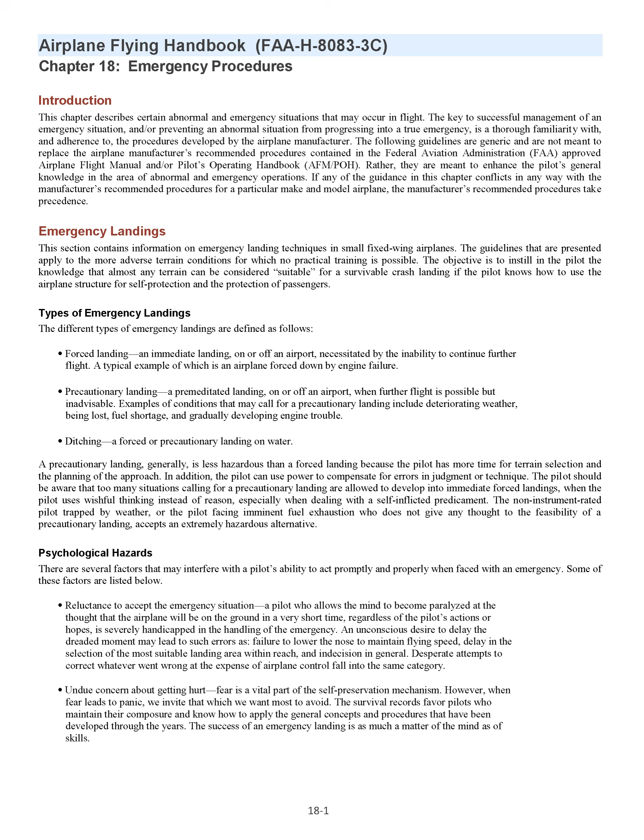Desire to save the airplane. The pilot who has been conditioned during training to expect to find a relatively safe landing area, whenever the flight instructor closed the throttle for a simulated forced landing, may ignore all basic rules of airmanship to avoid a touchdown in terrain where airplane damage is unavoidable. Typical consequences are: making a 180 degree turn back to the runway when available altitude is insufficient, stretching the glide without regard for minimum control speed in order to reach a more appealing field, and accepting an approach and touchdown situation that leaves no margin for error.

The desire to save the airplane, regardless of the risks involved, may be influenced by two other factors: the pilot's financial stake in the airplane and the certainty that an undamaged airplane implies no bodily harm. There are times, however, when a pilot should be more interested in sacrificing the airplane so that the occupants can safely walk away from it. Basic safety concepts.

A pilot who is faced with an emergency landing in terrain that makes extensive airplane damage inevitable should keep in mind that the avoidance of crash injuries is largely a matter of: 1. Keeping the vital structure, cabin area, relatively intact by using dispensable structure, i.e., wings, landing gear, fuselage bottom, to absorb the violence of the stopping process before it affects the occupants, and 2. Avoiding forceful bodily contact with interior structure.

Avoiding forcible contact with interior structure is a matter of seat and body security. Unless the occupant decelerates at the same rate as the surrounding structure, no benefit is realized from its relative intactness. The occupant is brought to a stop violently in the form of a secondary collision.

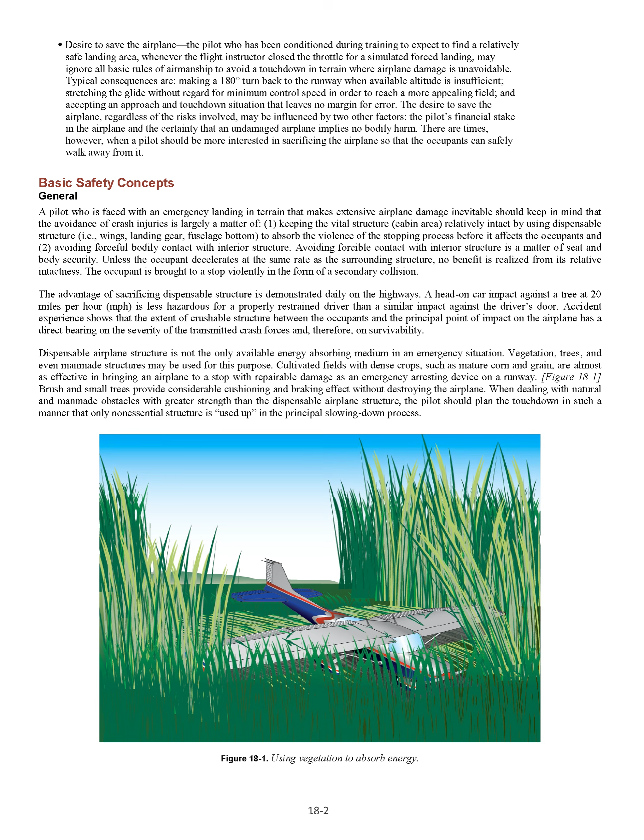Dispensable airplane structure is not the only available energy-absorbing medium in an emergency situation. Vegetation, trees, and even man-made structures may be used for this purpose. Cultivated fields with dense crops, such as mature corn and grain, are almost as effective in bringing an airplane to a stop with repairable damage as an emergency arresting device on a runway. Brush and small trees provide considerable cushioning and braking effect without destroying the airplane. When dealing with natural and man-made obstacles with greater strength than the dispensable airplane structure, the pilot should plan the touchdown in such a manner that only non-essential structure is used up in the principal slowing down process.

The overall severity of a deceleration process is governed by speed, ground speed, and stopping distance. The most critical of these is speed. Doubling the ground speed means quadrupling the total destructive energy and vice versa. Even a small change in ground speed at touchdown, be it as a result of wind or pilot technique, affects the outcome of a controlled crash. It is important that the actual touchdown during an emergency landing be made at the lowest possible controllable airspeed, using all available aerodynamic devices.

Most pilots instinctively, and correctly, look for the largest available flat and open field for an emergency landing. Actually, very little stopping distance is required if the speed can be dissipated uniformly, that is, if the deceleration forces can be spread evenly over the available distance. This concept is designed into the arresting gear of aircraft carriers that provides a nearly constant stopping force from the moment of hookup.

The typical light airplane is designed to provide protection in crash landings that expose the occupants to 9 times the acceleration of gravity, 9g, in a forward direction. Assuming a uniform 9g deceleration, at 50 miles per hour the required stopping distance is about 9.4 feet, while at 100 miles per hour, the stopping distance is about 37.6 feet, about 4 times as great. Although these figures are based on an ideal deceleration process, it is interesting to note what can be accomplished in an effectively used short stopping distance.

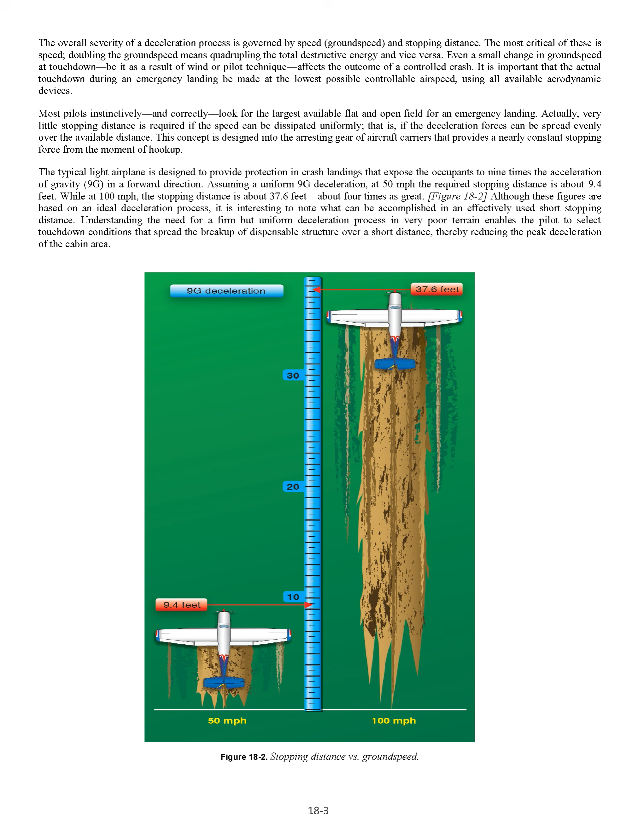Understanding the need for a firm but uniform deceleration process in very poor terrain enables the pilot to select touchdown conditions that spread the breakup of dispensable structure over a short distance, thereby reducing the peak deceleration of the cabin area. Attitude and sink rate control.

The most critical and often the most inexcusable error that can be made in the planning and execution of an emergency landing, even in ideal terrain, is the loss of initiative over the airplane's attitude and sink rate at touchdown. When the touchdown is made on flat, open terrain, an excessive nose-low pitch attitude brings the risk of sticking the nose in the ground. Steep bank angles just before touchdown should also be avoided, as they increase the stalling speed and the likelihood of a wingtip strike.

Since the airplane's vertical component of velocity is immediately reduced to zero upon ground contact, it should be kept well under control. A flat touchdown at a high sink rate, well in excess of 500 feet per minute (fpm), on a hard surface can be injurious without destroying the cabin structure, especially during gear-up landings in low-wing airplanes. A rigid bottom construction of these airplanes may preclude adequate cushioning by structural deformation. Similar impact conditions may cause structural collapse of the overhead structure in high-wing airplanes. On soft terrain, an excessive sink rate may cause digging in of the lower nose structure and severe forward deceleration. Terrain selection.

A pilot's choice of emergency landing sites is governed by the route selected during pre-flight planning, the height above the ground when the emergency occurs, and excess airspeed. Excess airspeed can be converted into distance and/or altitude. The only time the pilot has a very limited choice is during the low and slow portion of the takeoff. However, even under these conditions, the ability to change the impact heading only a few degrees may ensure a survivable

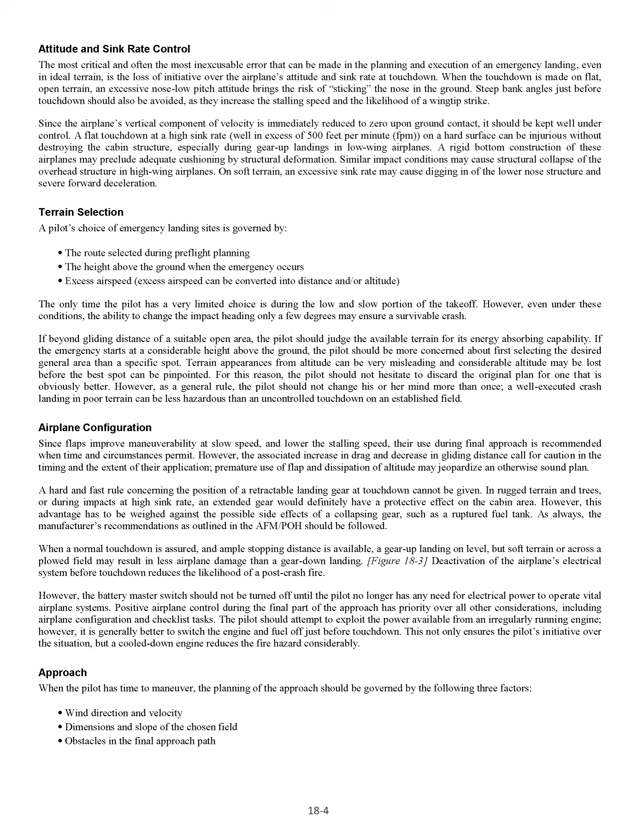Approach. When the pilot has time to maneuver, the planning of the approach should be governed by the following three factors: wind direction and velocity, dimensions and slope of the chosen field, and obstacles in the final approach path. These three factors are seldom compatible. When compromises have to be made, the pilot should aim for a wind/obstacle/terrain combination that permits a final approach with some margin for error in judgment or technique.

A pilot who overestimates the gliding range may be tempted to stretch the glide across obstacles in the approach path. For this reason, it is sometimes better to plan the approach over an unobstructed area, regardless of wind direction. Experience shows that a collision with obstacles at the end of a ground roll or slide is much less hazardous than striking an obstacle at flying speed before the touchdown point is reached.

Terrain types. Since an emergency landing on suitable terrain resembles a situation with which the pilot should be familiar through training, only the more unusual situations are discussed. Confined areas. The natural preference to set the airplane down on the ground should not lead to the selection of an open spot between trees or obstacles where the ground cannot be reached without making a steep descent.

Once the intended touchdown point is reached, and the remaining open and unobstructed space is very limited, it may be better to force the airplane down on the ground than to delay touchdown until it settles. An airplane decelerates faster after it is on the ground than while airborne. Thought may also be given to the desirability of ground looping or retracting the landing gear in certain conditions. A river or creek can be an inviting alternative in otherwise rugged terrain. The pilot should ensure that the water or creek bed can be reached without snagging the wings.

The same concept applies to road landings, with one additional reason for caution: man-made obstacles on either side of a road may not be visible until the final portion of the approach. When planning the approach across a road, it should be remembered that most highways and even rural dirt roads are paralleled by power or telephone lines. Only a sharp lookout for the supporting structures or poles may provide timely warning.

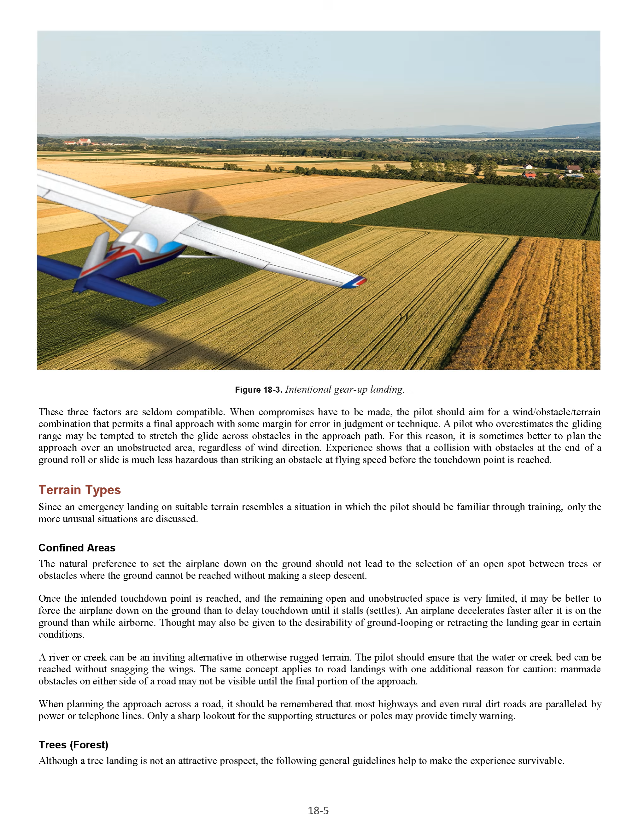Trees, forest. Although a tree landing is not an attractive prospect, the following general guidelines help to make the experience survivable. Use the normal landing configuration, full flaps, gear down. Keep the ground speed low by heading into the wind. Make contact at minimum indicated airspeed, but not below stall speed, and hang the airplane in the tree branches in a nose-high landing attitude. Involving the underside of the fuselage and both wings in the initial tree contact provides a more even and positive cushioning effect, while preventing penetration of the windshield.

Avoid direct contact of the fuselage with heavy tree trunks. Low, closely spaced trees with wide, dense crowns, branches close to the ground are much better than tall trees with thin tops. The latter allow too much free fall height. A free fall from 75 feet results in an impact speed of about 40 knots, or about 4,000 fpm.

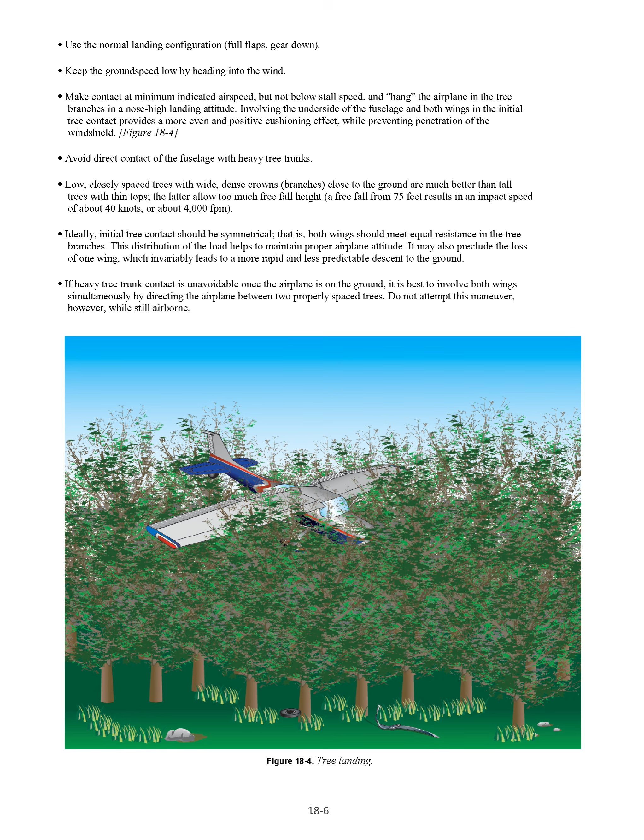Ideally, initial tree contact should be symmetrical, that is, both wings should meet equal resistance in the tree branches. This distribution of the load helps to maintain proper airplane attitude. It may also preclude the loss of one wing, which invariably leads to a more rapid and less predictable descent to the ground. If heavy tree trunk contact is unavoidable once the airplane is on the ground, it is best to involve both wings simultaneously by directing the airplane between two properly spaced trees. Do not attempt this maneuver, however, while still airborne.

Water, ditching, and snow. A well-executed water landing normally involves less deceleration violence than a poor tree landing or a touchdown on extremely rough terrain. Also, an airplane that is ditched at minimum speed and in a normal landing attitude does not immediately sink upon touchdown. Intact wings and fuel tanks, especially when empty, provide flotation for at least several minutes, even if the cabin may be just below the water line in a high-wing airplane.

Loss of depth perception may occur when landing on a wide expanse of smooth water, with the risk of flying into the water or stalling in from excessive altitude. To avoid this hazard, the airplane should be dragged in when possible. Use no more than intermediate flaps on low-wing airplanes. The water resistance of fully extended flaps may result in asymmetrical flap failure and slowing of the airplane. Keep a retractable gear up unless the AFM/POH advises otherwise. A landing in snow should be executed like a ditching, in the same configuration and with the same regard for loss of depth perception, white out, in reduced visibility and on wide open terrain.

Engine failure after takeoff, single engine. A number of variables and pilot actions factor into a successful emergency landing shortly after takeoff. When an engine failure occurs during the initial climb, the pilot should lower the nose of the airplane and establish the proper glide attitude. What happens next if the engine does not restart? Does the pilot select a field directly ahead, or slightly to the side of the takeoff path, or should the pilot turn back toward the point of departure? There's not much time to decide and a lot to consider.

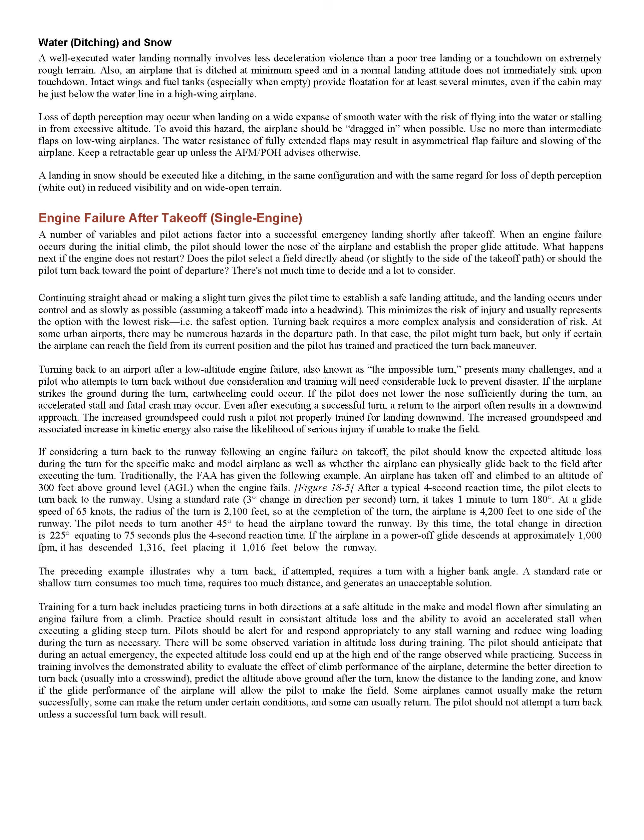A turn back to the departure runway may require more than a 180 degrees change in direction. There could also be cases where turning back results in overshooting the runway, and the pilot needs to sense the aiming point within seconds after completing a turn back and make any necessary adjustments to achieve the best possible outcome.

A turn back at low altitudes presents an unacceptable risk for student pilots, low-time pilots, untrained pilots, pilots without adequate proficiency, and pilots flying airplanes with insufficient glide performance to return to the field. However, experienced pilots interested in knowing when and how to make an emergency turn back after takeoff should use the services of an authorized flight instructor who can explain and demonstrate the practicality, or impracticality, of the impossible turn in the specific make and model used during training.

Emergency descents. An emergency descent is a maneuver for descending as rapidly as possible to a lower altitude or to the ground for an emergency landing. The need for this maneuver may result from an uncontrollable fire, a sudden loss of cabin pressurization, or any other situation demanding an immediate and rapid descent. The objective is to descend the airplane as soon and as rapidly as possible while not exceeding any structural limitations of the airplane.

Simulated emergency descents should be made in a turn to check for other air traffic below and to look around for a possible emergency landing area. A radio call announcing descent intentions may be appropriate to alert other aircraft in the area. When initiating the descent, a bank of approximately 30 to 45 degrees should be established to maintain positive load factors, G-forces, on the airplane. Emergency descent training should be performed as recommended by the manufacturer, including the configuration and airspeeds.

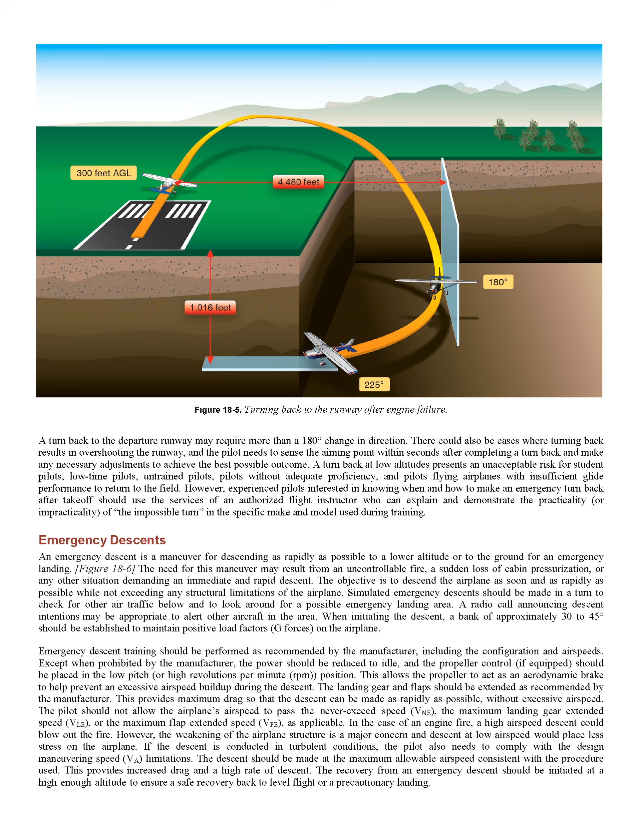The recovery from an emergency descent should be initiated at a high enough altitude to ensure a safe recovery back to level flight or a precautionary landing. When the descent is established and stabilized during training and practice, the descent should be terminated. In airplanes with piston engines, prolonged practice of emergency descent should be avoided to prevent excessive cooling of the engine cylinders.

In-flight fire. A fire in flight demands immediate and decisive action. The pilot should be familiar with the procedures outlined to meet this emergency contained in the AFM/POH for the particular airplane. For the purposes of this handbook, in-flight fires are classified as in-flight engine fires, electrical fires, and cabin fires.

Engine fire. An in-flight engine compartment fire is usually caused by a failure that allows a flammable substance, such as fuel, oil, or hydraulic fluid, to come in contact with a hot surface. This may be caused by a mechanical failure of the engine itself, an engine-driven accessory, a defective induction or exhaust system, or a broken line. Engine compartment fires may also result from maintenance errors, such as improperly installed/fastened lines and/or fittings resulting in leaks.

Engine compartment fires can be indicated by smoke and/or flames coming from the engine cowling area. They can also be indicated by discoloration, bubbling, and/or melting of the engine cowling skin in cases where flames and/or smoke are not visible to the pilot. By the time a pilot becomes aware of an in-flight engine compartment fire, it usually is well developed.

Unless the airplane manufacturer directs otherwise in the AFM/POH, the first step on discovering a fire should be to shut off the fuel supply to the engine by placing the mixture control in the idle cutoff position and the fuel selector shutoff valve to the off position. The ignition switch should be left on in order to use up the fuel that remains in the fuel lines and components between the fuel selector/shutoff valve and the engine. This procedure may starve the engine compartment of fuel and cause the fire to die naturally. If the flames are snuffed out, no attempt should be made to restart the engine.

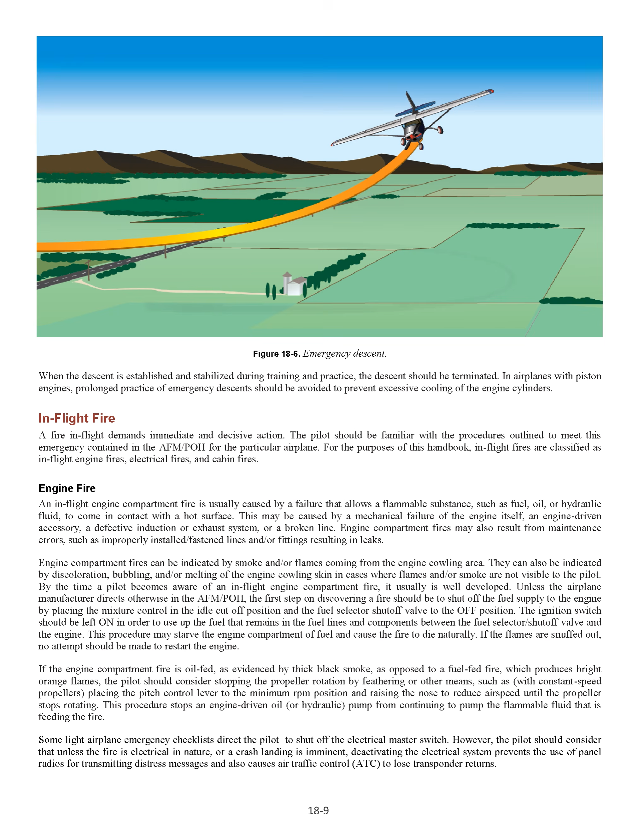Some light airplane emergency checklists direct the pilot to shut off the electrical master switch. However, the pilot should consider that unless the fire is electrical in nature, or a crash landing is imminent, deactivating the electrical system prevents the use of panel radios for transmitting distress messages and also causes air traffic control, ATC, to lose transponder returns.

Pilots of powerless single-engine airplanes are left with no choice but to make a forced landing. Pilots of twin-engine airplanes may elect to continue the flight to the nearest airport. However, consideration should be given to the possibility that a wing could be seriously impaired and lead to structural failure. Even a brief but intense fire could cause dangerous structural damage. In some cases, the fire could continue to burn under the wing, or engine cowling in the case of a single-engine airplane, out of view of the pilot.

Engine compartment fires that appear to have been extinguished have been known to rekindle with changes in airflow pattern and airspeed. The pilot should be familiar with the airplane's emergency descent procedures. The pilot should also bear in mind the following.

The airplane may be severely structurally damaged to the point that its ability to remain under control could be lost at any moment. The airplane may still be on fire and susceptible to explosion. The airplane is expendable and the only thing that matters is the safety of those on board.

Electrical fires. The initial indication of an electrical fire is usually the distinct odor of burning insulation. Once an electrical fire is detected, the pilot should attempt to identify the faulty circuit by checking circuit breakers, instruments, avionics, and lights. If the faulty circuit cannot be readily detected and isolated, and flight conditions permit, the battery master switch and alternator/generator switches should be turned off to remove the possible source of the fire. However, any materials that have been ignited may continue to burn.

If electrical power is absolutely essential for the flight, an attempt may be made to identify and isolate the faulty circuit by: 1. Turning the electrical master switch off. 2. Turning all individual electrical switches off. 3. Turning the master switch back on. 4. Selecting electrical switches that were on before the fire indication one at a time, permitting a short time lapse after each switch is turned on to check for signs of odor, smoke, or sparks.

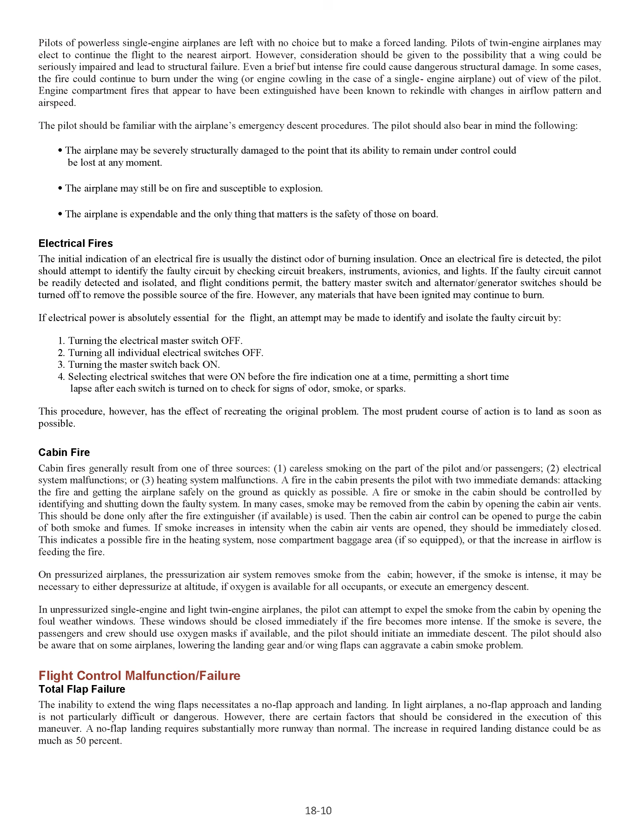Flight control malfunction/failure. Total flap failure. The inability to extend the wing flaps necessitates a no-flap approach and landing. In light airplanes, a no-flap approach and landing is not particularly difficult or dangerous. However, there are certain factors that should be considered in the execution of this maneuver. A no-flap landing requires substantially more runway than normal. The increase in required landing distance could be as much as 50%.

When flying in the traffic pattern with the wing flaps retracted, the airplane should be flown in a relatively nose-high attitude to maintain altitude, as compared to flight with flaps extended. Losing altitude can be more of a problem without the benefit of the drag normally provided by flaps. A wider, longer traffic pattern may be required in order to avoid the necessity of diving to lose altitude and consequently building up excessive airspeed.

On final approach, a nose-high attitude can make it difficult to see the runway. This situation, if not anticipated, can result in serious errors in judgment of height and distance. Approaching the runway in a relatively nose-high attitude can also cause the perception that the airplane is close to a stall. This may cause the pilot to lower the nose abruptly and risk touching down on the nose wheel. With the flaps retracted and the power reduced for landing, the airplane is slightly less stable in the pitch and roll axes.

Without flaps, the airplane tends to float considerably during roundout. The pilot should avoid the temptation to force the airplane onto the runway at an excessively high speed. Neither should the pilot flare excessively because without flaps, this might cause the tail to strike the runway.

Asymmetric split flap. An asymmetric split flap situation is one in which one flap deploys or retracts while the other remains in position. The problem is indicated by a pronounced roll toward the wing with the least flap deflection when wing flaps are extended/retracted. The roll encountered in a split flap situation is countered with opposite aileron.

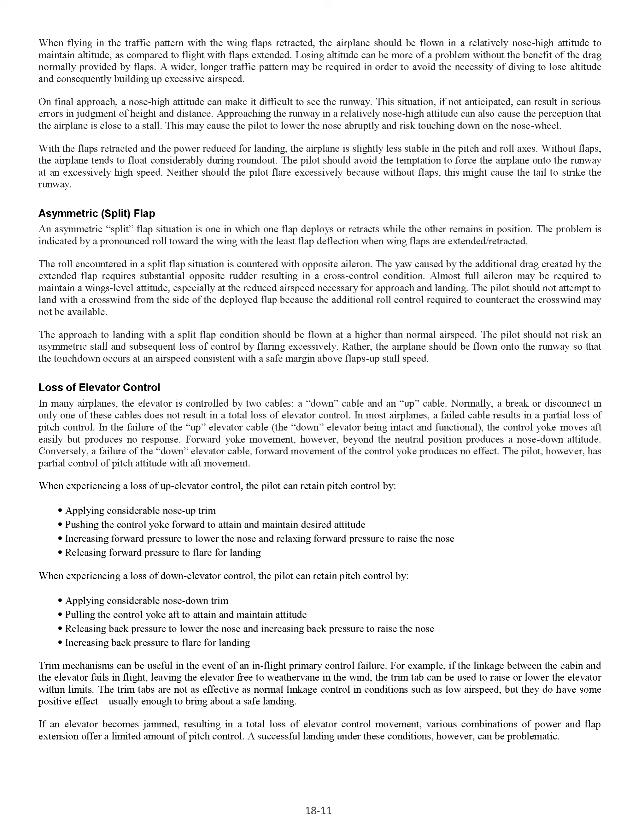Landing gear malfunction. Once the pilot has confirmed that the landing gear has in fact malfunctioned and that one or more gear legs refuses to respond to the conventional or alternate methods of gear extension contained in the AFM/POH, a gear-up landing is considered inevitable. The pilot should select an airport with crash and rescue facilities, if possible. The pilot should not hesitate to request that emergency equipment is standing by.

When selecting a landing surface, the pilot should consider that a smooth, hard surface runway usually causes less damage than a rough, unimproved grass strip. A hard surface does, however, create sparks that can ignite fuel. If the airport is so equipped, the pilot can request that the runway surface be foamed. The pilot should consider burning off excess fuel. This reduces landing speed and fire potential.

If the landing gear malfunction is limited to one main landing gear leg, the pilot should consume as much fuel from that side of the airplane as practicable, thereby reducing the weight of the wing on that side. The reduced weight makes it possible to delay the unsupported wing from contacting the surface during the landing roll until the last possible moment. Reduced impact speeds result in less damage.

If only one landing gear leg fails to extend, the pilot has the option of landing on the available gear legs or landing with all the gear legs retracted. Landing on only one main gear usually causes the airplane to veer strongly in the direction of the faulty gear leg after touchdown. If the landing runway is narrow and/or ditches and obstacles line the runway edge, maximum directional control after touchdown is a necessity. In this situation, a landing with all three gear retracted may be the safest course of action.

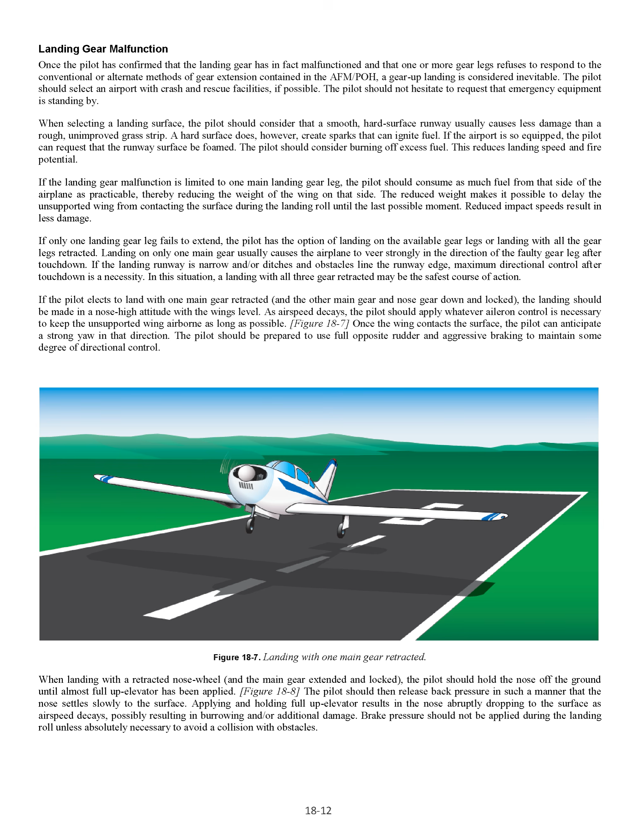When landing with a retracted nose wheel, and the main gear extended and locked, the pilot should hold the nose off the ground until almost full up elevator has been applied. The pilot should then release back pressure in such a manner that the nose settles slowly to the surface. Applying and holding full up elevator results in the nose abruptly dropping to the surface as airspeed decays, possibly resulting in burrowing and/or additional damage. Brake pressure should not be applied during the landing roll unless absolutely necessary to avoid a collision with obstacles.

If the landing occurs with only the nose gear extended, the initial contact should be made on the aft fuselage structure with a nose-high attitude. This procedure helps prevent porpoising and/or wheelbarrowing. The pilot should then allow the nose wheel to gradually touch down, using nose wheel steering as necessary for directional control. System malfunctions. Electrical system.

The loss of electrical power can deprive the pilot of numerous critical systems, and therefore should not be taken lightly even in day/visual flight rules (VFR) conditions. Most in-flight failures of the electrical system are located in the generator or alternator. Once the generator or alternator system goes offline, the electrical source in a typical light airplane is a battery. If a warning light or ammeter indicates the probability of an alternator or generator failure in an airplane with only one generating system, however, the pilot may have very little time available from the battery.

The rating of the airplane battery provides a clue as to how long it may last. With batteries, the higher the amperage load, the faster any available stored energy gets consumed. Thus, a 25 amp-hour battery could produce 5 amps per hour for 5 hours, but if the load were increased to 10 amps, it might last only 2 hours. A 40 amp load might discharge the battery fully in about 10 or 15 minutes. Much depends on the battery condition at the time of the system failure.

If the battery has been in service for a few years, its power may be reduced substantially because of internal resistance. Or if the system failure was not detected immediately, much of the stored energy may have already been used. It is essential, therefore, that the pilot immediately shed non-essential loads when the generating source fails. The pilot should then plan to land at the nearest suitable airport.

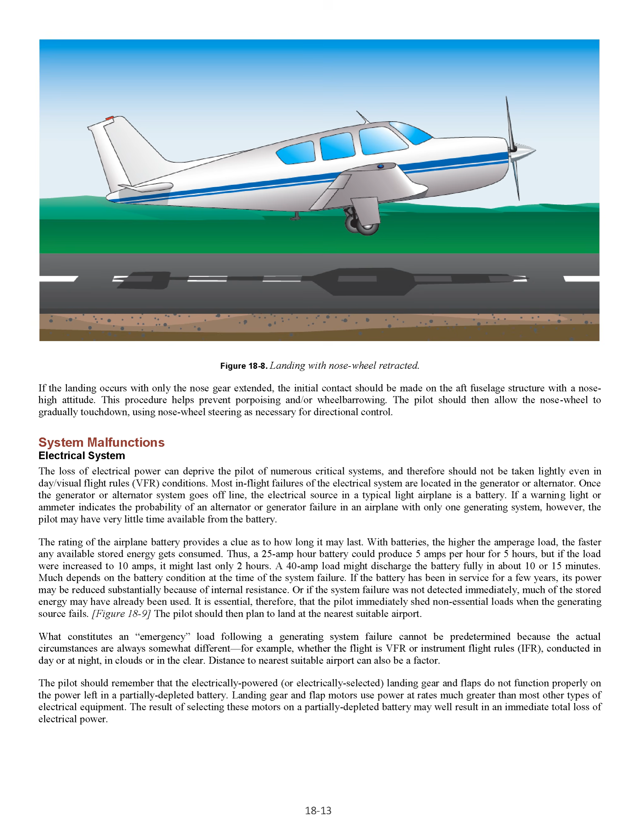The pilot should remember that the electrically powered, or electrically selected, landing gear and flaps do not function properly on the power left in a partially depleted battery. Landing gear and flap motors use power at rates much greater than most other types of electrical equipment. The result of selecting these motors on a partially depleted battery may well result in an immediate total loss of electrical power.

If the pilot expects an imminent and complete in-flight loss of electrical power, the following steps should be taken. Shed all but the most necessary electrically driven equipment. Understand that any loss of electrical power is critical in a small airplane. Notify ATC of the situation immediately. Request radar vectors for a landing at the nearest suitable airport. If landing gear or flaps are electrically controlled or operated, plan the arrival well ahead of time. Expect to make a no-flap landing and anticipate a manual landing gear extension.

Pitot-static system. The source of the pressure for operating the airspeed indicator, the vertical speed indicator (VSI), and the altimeter is the pitot-static system. The major components of the pitot-static system are the impact pressure chamber and lines and the static pressure chamber and lines, each of which are subject to total or partial blockage by ice, dirt, and/or other foreign matter.

Blockage of the pitot-static system adversely affects instrument operation. Partial static system blockage is insidious in that it may go unrecognized until a critical phase of flight. During takeoff, climb, and level off at cruise altitude, the altimeter, airspeed indicator, and VSI may operate normally. No indication of malfunction may be present until the airplane begins a descent.

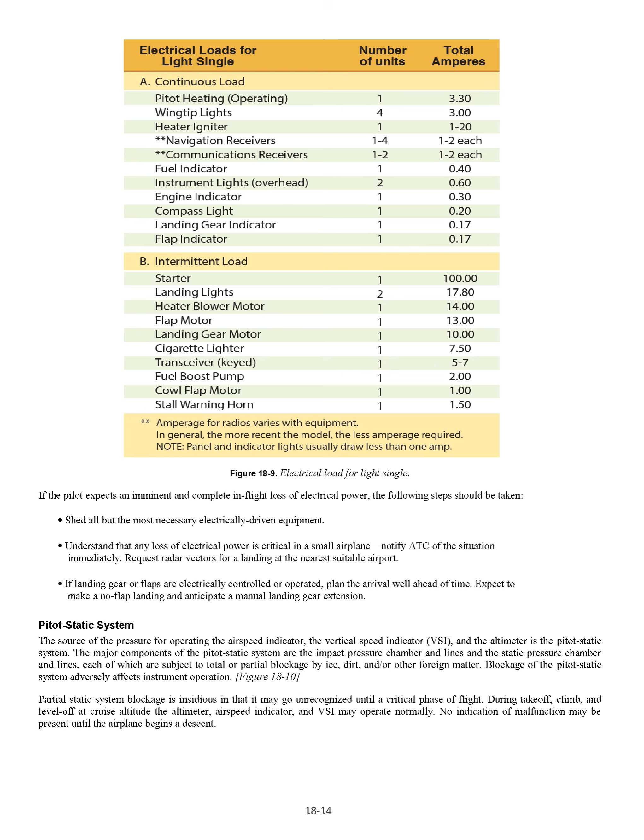If the static reference system is severely restricted, but not entirely blocked, as the airplane descends, the static reference pressure at the instruments begins to lag behind the actual outside air pressure. While descending, the altimeter may indicate that the airplane is higher than actual because the obstruction slows the airflow from the static port to the altimeter. The VSI confirms the altimeter's information regarding rate of change because the reference pressure is not changing at the same rate as the outside air pressure.

The airspeed indicator, unable to tell whether it is experiencing more airspeed pitot pressure or less static reference pressure, indicates a higher airspeed than actual. To the pilot, the instruments indicate that the airplane is too high, too fast, and descending at a rate much lower than desired. If the pilot levels off and then begins a climb, the altitude indication may still lag. The VSI indicates that the airplane is not climbing as fast as actual. The indicated airspeed, however, may begin to decrease at an alarming rate. The least amount of pitch-up attitude may cause the airspeed needle to indicate dangerously near stall speed.

Managing a static system malfunction requires that the pilot know and understand the airplane's pitot-static system. If a system malfunction is suspected, the pilot should confirm it by opening the alternate static source. This should be done while the airplane is climbing or descending. If the instrument needles move significantly when this is done, a static pressure problem exists and the alternate source should be used during the remainder of the flight.

Failure of the pitot-static system may also have serious consequences for electronic flight instrument systems, EFIS. To satisfy the requirements of Title 14 of the Code of Federal Regulations, 14 CFR, Part 23, Section 23.2615(b)(2), information essential for continued safe flight and landing will be available to the flight crew in a timely manner after any single failure or probable combination of failures.

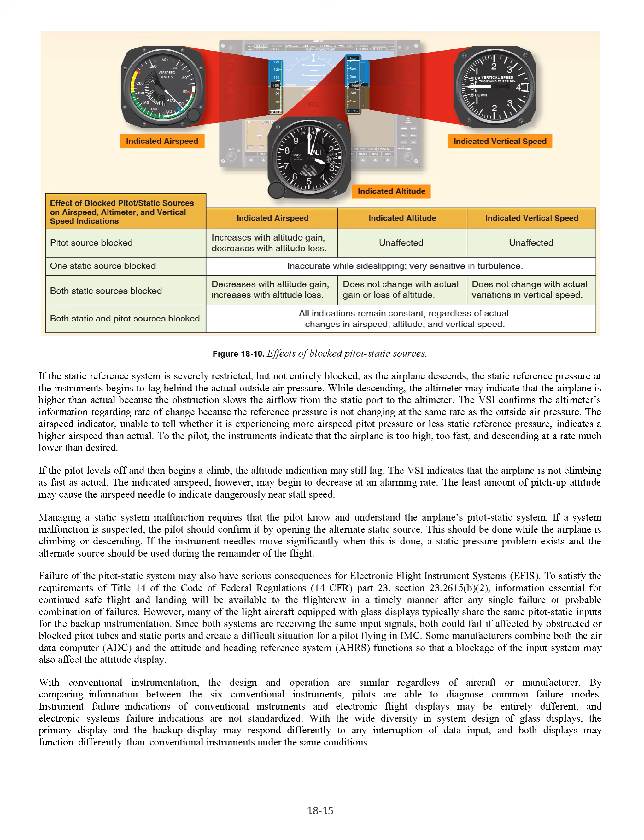It is imperative for pilots to obtain equipment-specific information in reference to both the aircraft and the avionics that fully prepare them to interpret and properly respond to equipment malfunctions of electronic flight instrument displays. Rapidly changing equipment, complex systems, and the difficulty or inability to simulate failure modes and functions can impose training limitations. Pilots still should be able to respond to equipment malfunctions in a timely manner without impairing other critical flight tasks should the need arise.

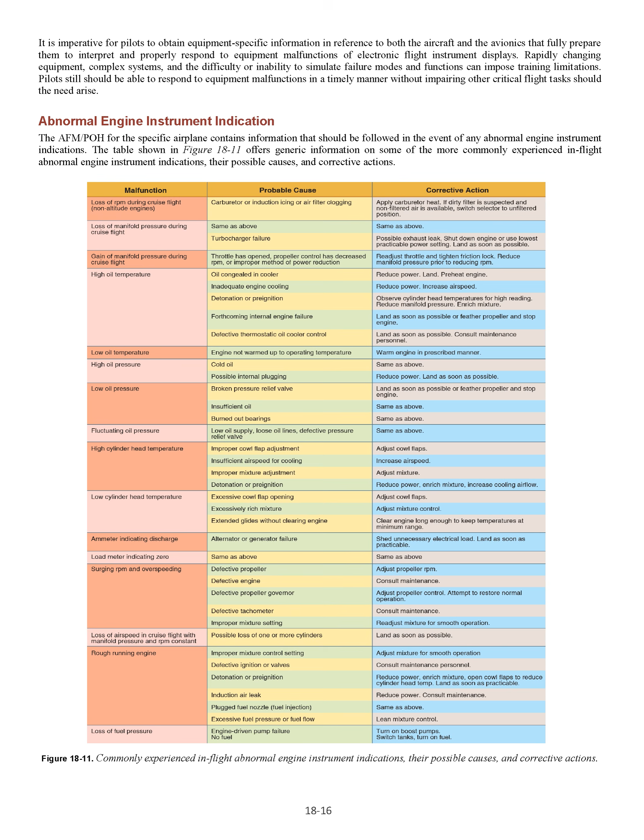Abnormal engine instrument indication. The AFM/POH for the specific airplane contains information that should be followed in the event of any abnormal engine instrument indications. The table shown in Figure 18-11 offers generic information on some of the more commonly experienced in-flight abnormal engine instrument indications, their possible causes, and corrective actions.

Door opening in flight. In most instances, the occurrence of an inadvertent door opening is not of great concern to the safety of a flight, but rather, the pilot's reaction at the moment the incident happens.

A door opening in flight may be accompanied by a sudden loud noise, sustained noise level, and possible vibration or buffeting. If a pilot allows himself or herself to become distracted to the point where attention is focused on the open door rather than maintaining control of the airplane, loss of control may result even though disruption of airflow by the door is minimal. In the event of an inadvertent door opening in flight or on takeoff, the pilot should adhere to the following. Concentrate on flying the airplane.

Particularly in light single and twin-engine airplanes, a cabin door that opens in flight seldom if ever compromises the airplane's ability to fly. There may be some handling effects, such as roll and/or yaw, but in most instances these can be easily overcome. If the door opens after liftoff, do not rush to land. Climb to normal traffic pattern altitude, fly a normal traffic pattern, and make a normal landing.

Do not release the seat belt and shoulder harness in an attempt to reach the door. Leave the door alone. Land as soon as practicable, and close the door once safely on the ground. Remember that most doors do not stay wide open. They usually bang open and then settle partly closed. A slip towards the door may cause it to open wider; a slip away from the door may push it closed. Do not panic. Try to ignore the unfamiliar noise and vibration.

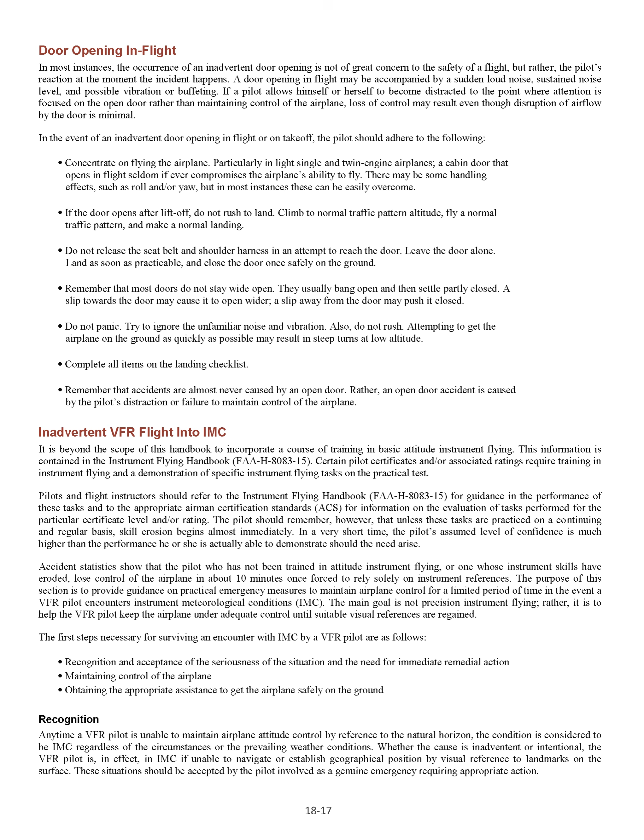Recognition. Anytime a VFR pilot is unable to maintain airplane attitude control by reference to the natural horizon, the condition is considered to be IMC regardless of the circumstances or the prevailing weather conditions. Whether the cause is inadvertent or intentional, the VFR pilot is, in effect, in IMC if unable to navigate or establish geographical position by visual reference to landmarks on the surface. These situations should be accepted by the pilot involved as a genuine emergency requiring appropriate action.

Pilots should understand that unless they are trained, qualified, and current in the control of an airplane solely by reference to flight instruments, they will be unable to do so for any length of time. Many hours of VFR flying using the attitude indicator as a reference for airplane control may lull pilots into a false sense of security based on an overestimation of their personal ability to control the airplane solely by instrument references. In VFR conditions, even though the pilot believes the instrument references will be easy to use, the pilot also receives an overview of the natural horizon and may subconsciously rely on it more than the attitude indicator.

If the natural horizon were to suddenly disappear, the untrained instrument pilot would be subject to vertigo, spatial disorientation, and inevitable control loss. Maintaining airplane control. Once the pilot recognizes and accepts the situation, he or she should understand that the only way to control the airplane safely is by using and trusting the flight instruments.

Attempts to control the airplane partially by reference to flight instruments while searching outside of the airplane for visual confirmation of the information provided by those instruments results in inadequate airplane control. This may be followed by spatial disorientation and complete control loss.

The most important point to be stressed is that the pilot should not panic. The task at hand may seem overwhelming, and the situation may be compounded by extreme apprehension. However, the pilot should make a conscious effort to relax. The pilot needs to understand the most important concern, in fact the only concern at this point, is to keep

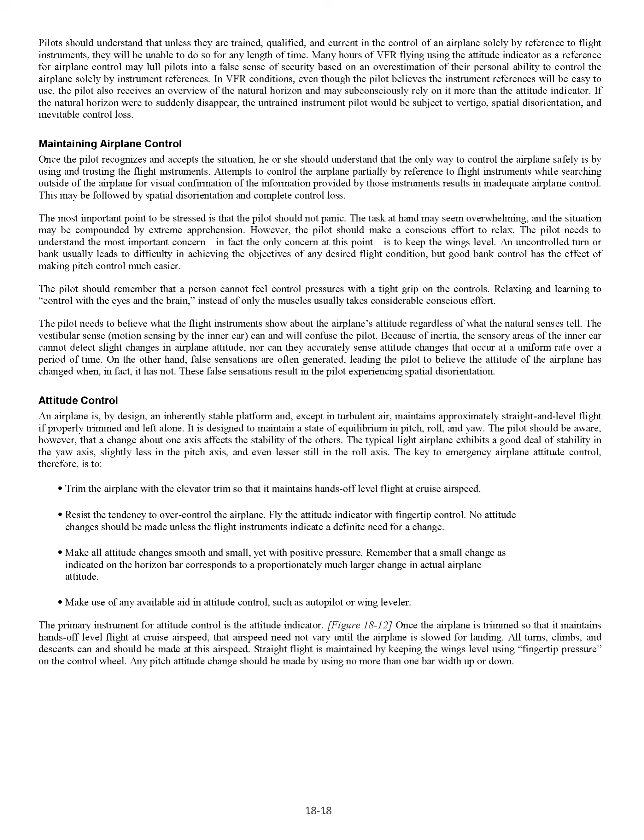Once the airplane is trimmed so that it maintains hands-off level flight at cruise airspeed, that airspeed need not vary until the airplane is slowed for landing. All turns, climbs, and descents can and should be made at this airspeed. Straight flight is maintained by keeping the wings level using fingertip pressure on the control wheel. Any pitch attitude change should be made by using no more than 1 bar width up or down.

Turns are perhaps the most potentially dangerous maneuver for the untrained instrument pilot for 2 reasons: the normal tendency of the pilot to over-control, leading to steep banks, and the possibility of a graveyard spiral. The inability of the pilot to cope with the instability resulting from the turn.

When a turn is to be made, the pilot should anticipate and cope with the relative instability of the roll axis. The smallest practical bank angle should be used, in any case no more than 10 degrees bank angle. A shallow bank takes very little vertical lift from the wings, resulting in little if any deviation in altitude.

It may be helpful to turn a few degrees and then return to level flight if a large change in heading is necessary. Repeat the process until the desired heading is reached. This process may relieve the progressive overbanking that often results from prolonged turns.

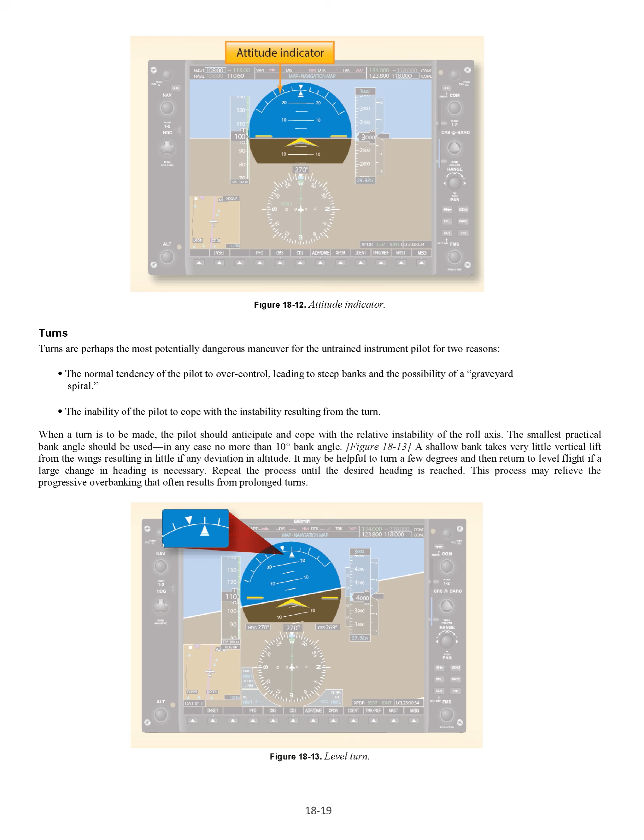Climbs: if a climb is necessary, the pilot should raise the miniature airplane on the attitude indicator no more than 1 bar width and apply power. The pilot should not attempt to attain a specific climb speed but accept whatever speed results. The objective is to deviate as little as possible from level flight attitude in order to disturb the airplane's equilibrium as little as possible. If the airplane is properly trimmed, it assumes a nose-up attitude on its own commensurate with the amount of power applied.

Torque and P-factor cause the airplane to have a tendency to bank and turn to the left. This should be anticipated and compensated for. If the initial power application results in an inadequate rate of climb, power should be increased in increments of 100 revolutions per minute or 1 inch of manifold pressure until the desired rate of climb is attained. Maximum available power is seldom necessary. The more power that is used, the more the airplane wants to bank and turn to the left.

Resuming level flight is accomplished by first decreasing pitch attitude to level on the attitude indicator using slow but deliberate pressure, allowing airspeed to increase to near cruise value and then decreasing power. Descents are very much the opposite of the climb procedure if the airplane is properly trimmed for hands-off straight and level flight. In this configuration, the airplane requires a certain amount of thrust to maintain altitude. The pitch attitude is controlling the airspeed. The engine power, therefore, translated into thrust by the propeller, is maintaining the selected altitude.

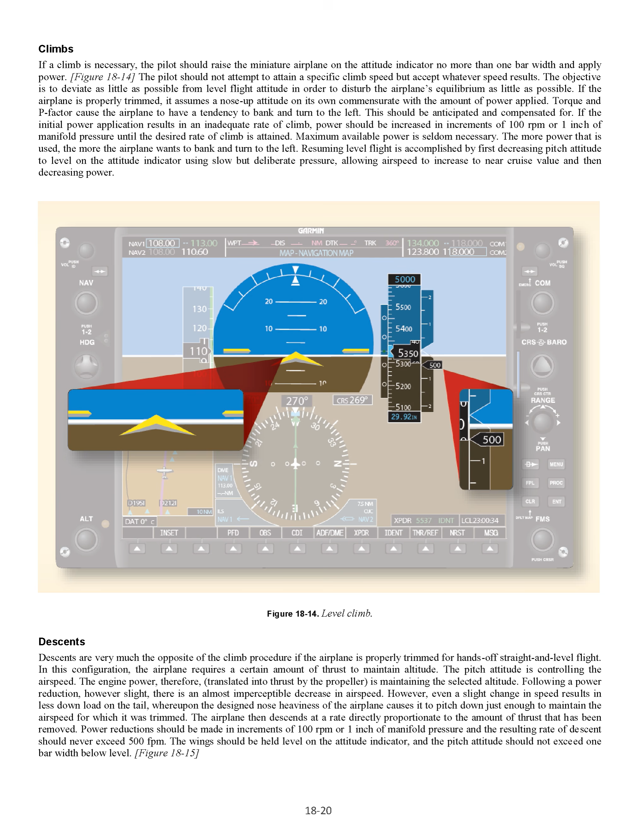Following a power reduction, however slight, there is an almost imperceptible decrease in airspeed. However, even a slight change in speed results in less down load on the tail, whereupon the designed nose heaviness of the airplane causes it to pitch down just enough to maintain the airspeed for which it was trimmed. The airplane then descends at a rate directly proportionate to the amount of thrust that has been removed. Power reductions should be made in increments of 100 revolutions per minute or 1 inch of manifold pressure, and the resulting rate of descent should never exceed 500 fpm. The wings should be held level on the attitude indicator, and the pitch attitude should not exceed 1 bar width below level.

Combined maneuvers, such as climbing or descending turns, should be avoided if at all possible by an untrained instrument pilot. Combining maneuvers only compounds the problems encountered in individual maneuvers and increases the risk of control loss. The objective is to keep the airplane under control by maintaining as much of the airplane's natural equilibrium as possible. Deviating as little as possible from straight and level flight attitude makes this much easier.

When being assisted by ATC, the pilot may detect a sense of urgency while being directed to change heading and/or altitude. This sense of urgency reflects a normal concern for safety on the part of the controller. Nevertheless, the pilot should not let this prompting lead to rushing into a maneuver that could result in loss of control. It's reasonable to ask the controller to slow down, if this becomes an issue.

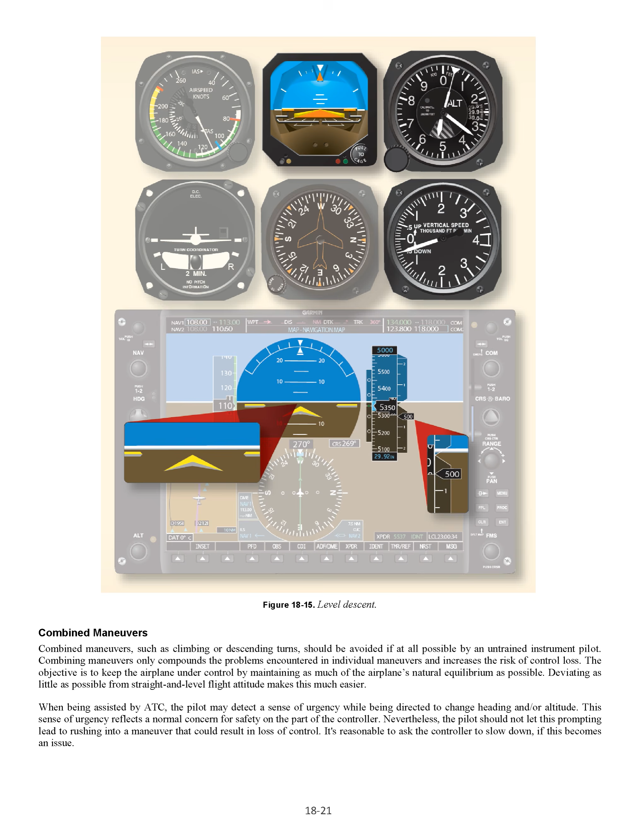Transition to visual flight. One of the most difficult tasks a trained and qualified instrument pilot contends with is the transition from instrument to visual flight prior to landing. For the untrained instrument pilot, these difficulties are magnified. The difficulties center around acclimatization and orientation. On an instrument approach, the trained instrument pilot prepares in advance for the transition to visual flight. The pilot has a mental picture of what to expect when the transition to visual flight is made and will quickly acclimate to the new environment. Geographical orientation also begins before the transition, as the pilot visualizes where the airplane is in relation to the airport/runway.

In an ideal situation, the transition to visual flight is made with ample time, at a sufficient altitude above terrain, and a visibility condition sufficient to accommodate acclimatization and geographical orientation. This, however, is not always the case. The untrained instrument pilot may find the visibility still limited, the terrain completely unfamiliar, and altitude above terrain such that a normal airport traffic pattern and landing approach is not possible. Additionally, the pilot is most likely under considerable self-induced psychological pressure to get the airplane on the ground. The pilot should take this into account and, if possible, allow time to become acclimatized and geographically oriented before attempting an approach and landing, even if it means flying straight and level for a time or circling the airport. This is especially true at night.

Emergency response systems. Airplanes may have installed systems that provide alternatives in certain emergency situations.

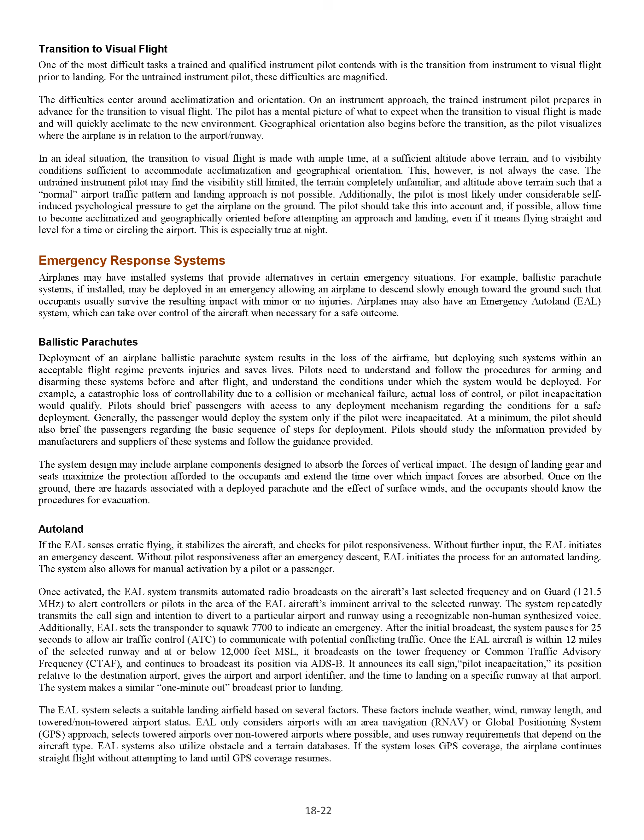Currently, EAL system capabilities do not include detecting and avoiding other aircraft, receiving or reacting to ATC instructions or notices to airmen, NOTAMs, avoiding military operations areas, MOAs, special use airspace, SUA, restricted areas, or temporary flight restrictions, TFRs, or turning on aircraft lights.

Chapter Summary. This chapter provided general guidance and recommended procedures that may apply to light single-engine airplanes involved in certain emergency situations. The information presented is intended to enhance the general knowledge of emergency operations with the clear understanding that the manufacturer's recommended emergency procedures take precedence. Information was provided concerning failure of the pitot-static system in aircraft with EFIS. The redundancy of backup systems for IFR flight may be less than desired if both the primary and backup instrumentation may receive signal data input from the same pitot-static source.

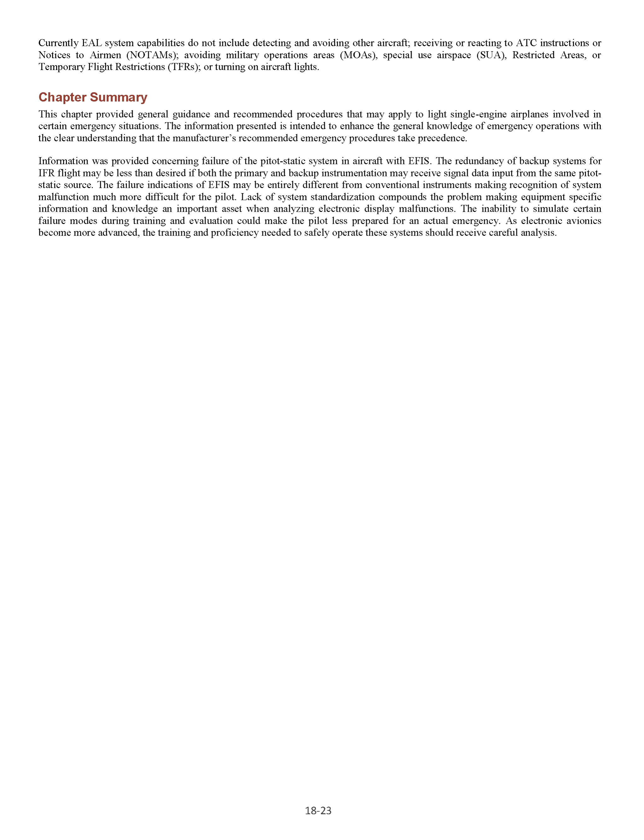The failure indications of EFIS may be entirely different from conventional instruments, making recognition of system malfunction much more difficult for the pilot. Lack of system standardization compounds the problem, making equipment-specific information and knowledge an important asset when analyzing electronic display malfunctions. The inability to simulate certain failure modes during training and evaluation could make the pilot less prepared for an actual emergency. As electronic avionics become more advanced, the training and proficiency needed to safely operate these systems should receive careful analysis.